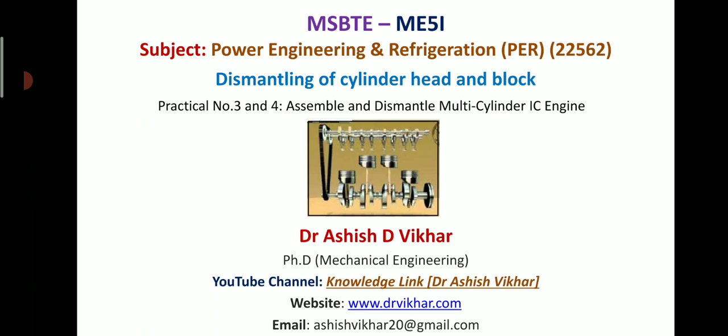Today we will discuss how to dismantle the cylinder head and cylinder block of a multi-cylinder internal combustion engine. This is part of practical numbers 3 and 4 of the subject power engineering and refrigeration. Before that, we should understand how the different components of multi-cylinder internal combustion engines are located. In this particular session, we will see how to dismantle the engine block.

Here you can see the engine block. This is the engine block. After that, you will see here the cylinder head. This is the cylinder head, and at the top you will see that there is a cylinder head cover. Between the cylinder head cover and the cylinder head, there is a cylinder head cover gasket, which you can see in the yellow color.

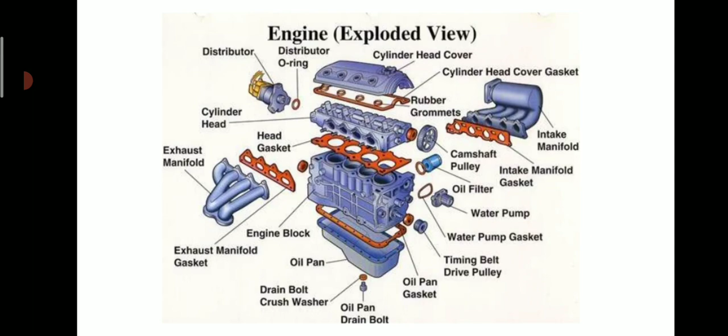After that, you will see other components also. You will see here the intake manifold, as well as on the left hand side the exhaust manifold. The intake manifold is used for providing the fuel supply, and the exhaust manifold is used for sending the burned gases to the outside. So these are the things which are important from today's lecture's point of view, and in this lecture we will understand how to dismantle the cylinder head and engine block or cylinder block.

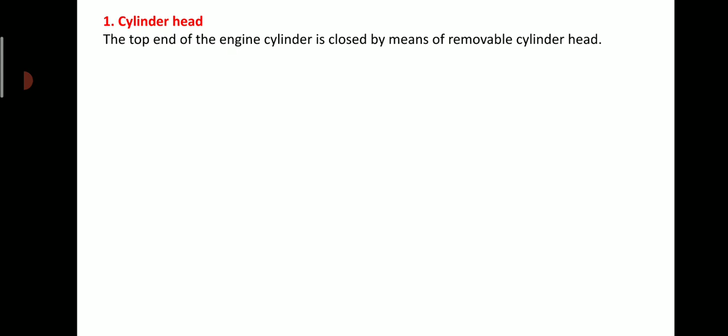So what is cylinder head? Before dismantling, you should know the meaning of cylinder head. It is located at the top end of the engine cylinder, which is closed by means of a removable cylinder head. There are two holes or ports at the cylinder head, one for intake of the fuel and the other for exhaust. Both the intake and exhaust ports are closed by two valves known as inlet and exhaust valve. So inlet and exhaust valves are attached to this component, which is called the cylinder head.

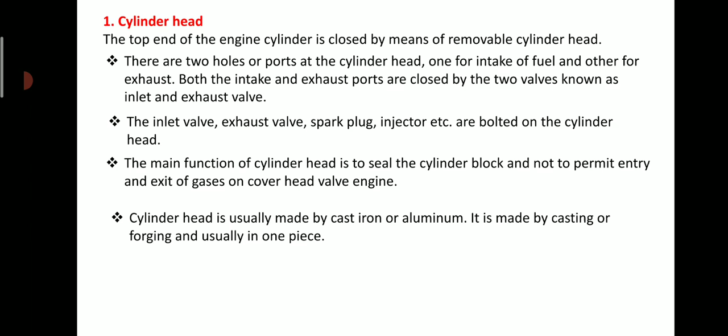The inlet valve, exhaust valve, spark plug and injector are bolted on the cylinder head. So these are the four important components attached to the cylinder head. The main function of the cylinder head is to seal the cylinder block and not to permit entry and exit of gases on the overhead valve engine. Cylinder head is usually made of cast iron or aluminum. It is made by casting or forging and usually is in one piece. So this is the information regarding cylinder head.

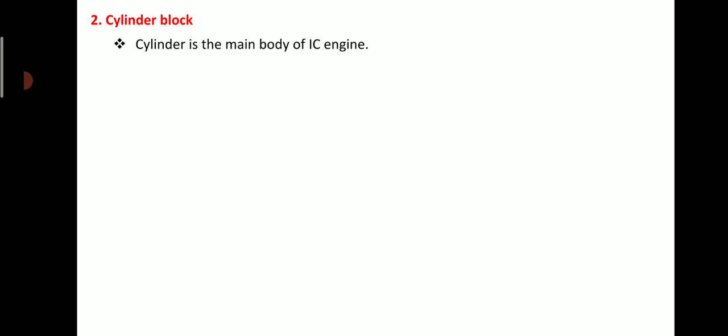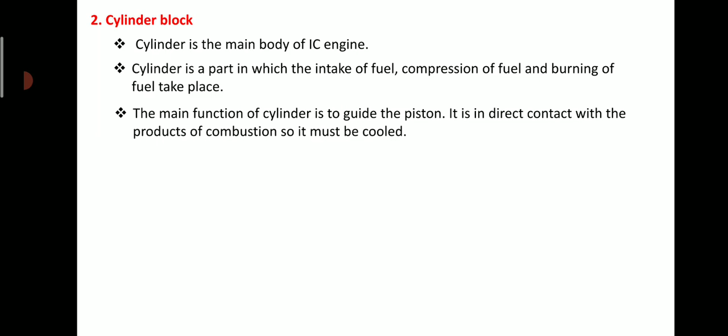Let us see what is cylinder block. Cylinder block or engine cylinder is the main body of the IC engine. Cylinder is the part in which the intake of fuel, compression of the fuel and burning of the fuel take place. The main function of the cylinder is to guide the piston. It is in direct contact with the products of combustion, so it must be cooled. For cooling of the cylinder, a water jacket or fins are situated at the outer side of the cylinder. Because of the huge temperature rise, we should provide cooling to the engine block, and this is achieved by the cooling arrangement.

At the upper end is the cylinder head, at the bottom end the crankcase is bolted. The upper side of the cylinder consists of the combustion chamber where the fuel burns. To handle all this pressure and temperature generated by combustion of the fuel, cylinder material should have high compressive strength. So it is made of high grade cast iron by casting, and usually cast in one piece. So this is the information regarding cylinder block.

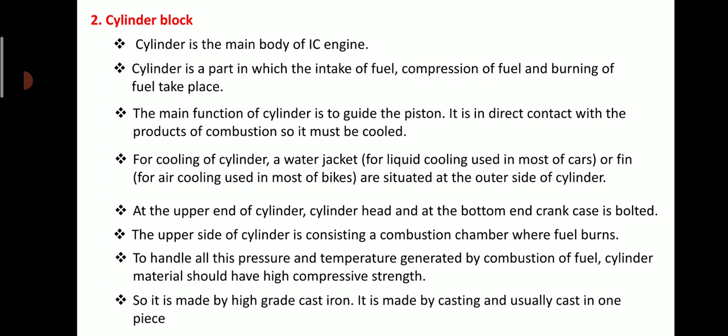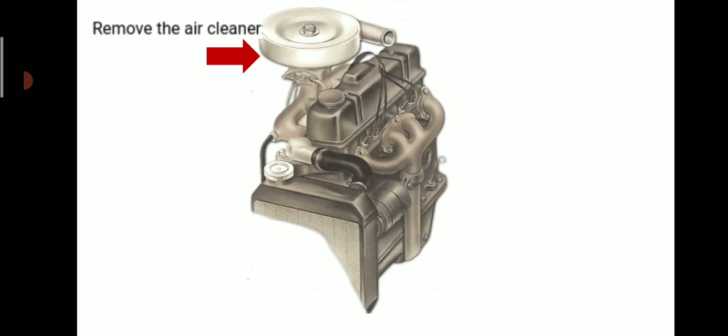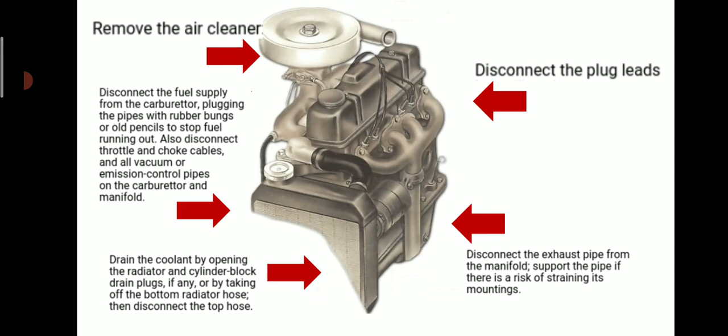Now let us see how to dismantle the cylinder head and cylinder block. First, we have to remove the air cleaner. After that, we have to disconnect the spark plug leads. After that, we have to disconnect the fuel supply from the carburetor. After that, we have to disconnect the exhaust pipe from the manifold support, and lastly we have to drain the coolant by opening the radiator and cylinder block drain plugs.

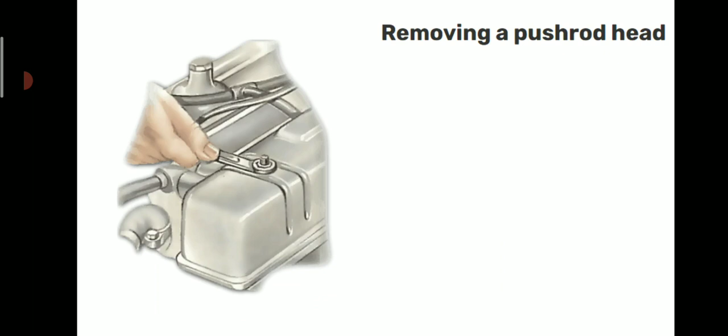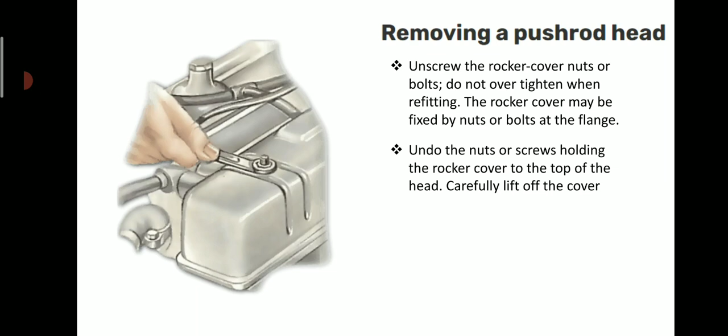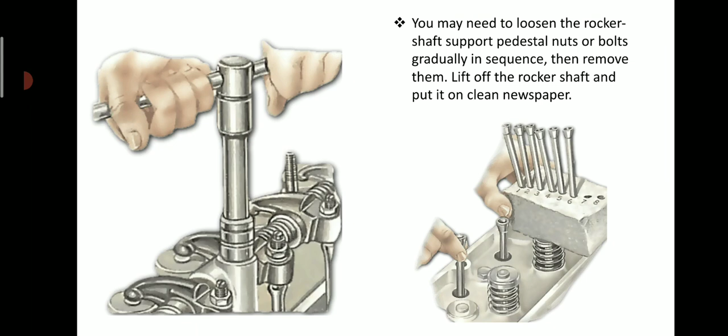After that, we have to remove the push rod head. As you can see in this picture, this push rod head is removed by unscrewing the rocker cover nuts or bolts. Do not over tighten when refitting. The rocker cover may be fixed by nuts or bolts at the flange. Undo the nuts or screws holding the rocker cover to the top of the head and carefully lift off the cover. After that, you may need to loosen the rocker shaft support pedestal nuts or bolts gradually in sequence, then remove them. Lift off the rocker shaft and put it on clean newspaper.

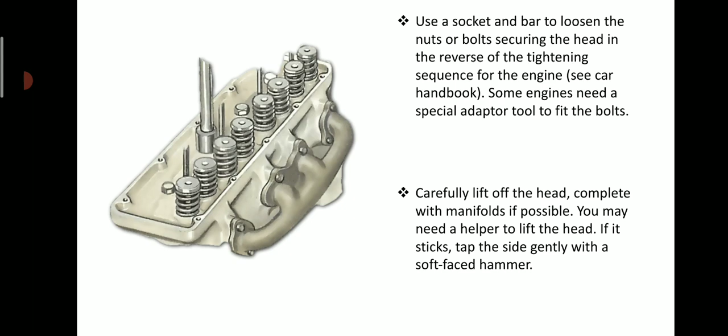After that, use a socket and bar to loosen the nuts or bolts securing the head in the reverse of the tightening sequence for the engine. Some engines need a special adapter tool to fit the bolts. Then carefully lift off the head, complete with the manifolds if possible. You may need a helper to lift the head. If it is stuck, tap the side gently with a soft faced hammer. In this way, the process of dismantling is done.